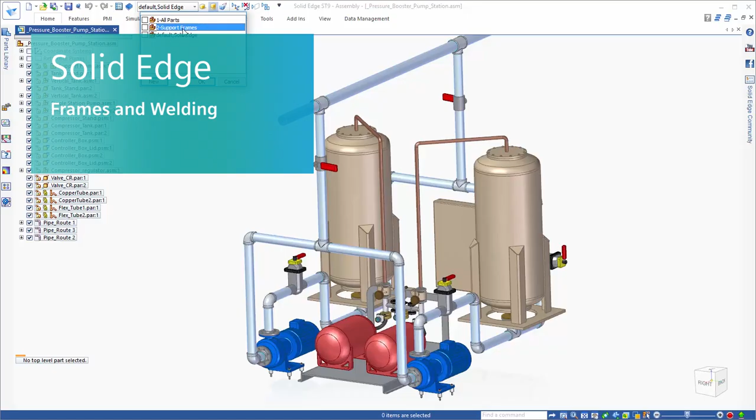In this example, we'll look at how Solid Edge handles frames and welding. Building framework is a common engineering task for many industries, and Solid Edge gives users access to tools that greatly ease the design process when designing and editing frames.

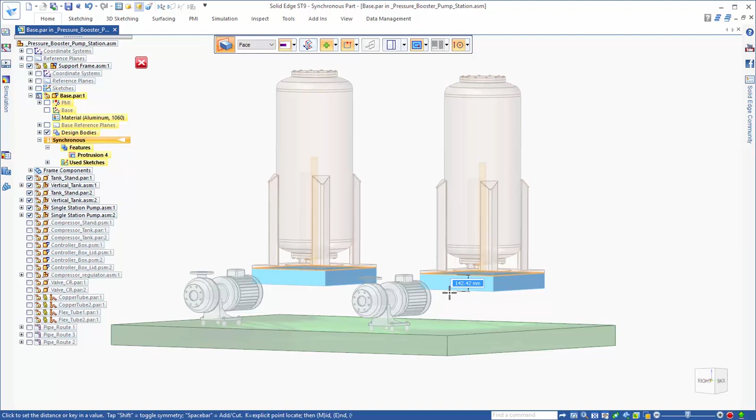The pump assembly framework we're working on has been partially completed, but we still need to finish up some final tasks. Two methods of frame creation that we'll explore today include using sketches as well as edges of solid bodies. Creating frames from a 3D solid means we can use any tools in Solid Edge's synchronous technology arsenal to create the exact geometry needed for our base shape.

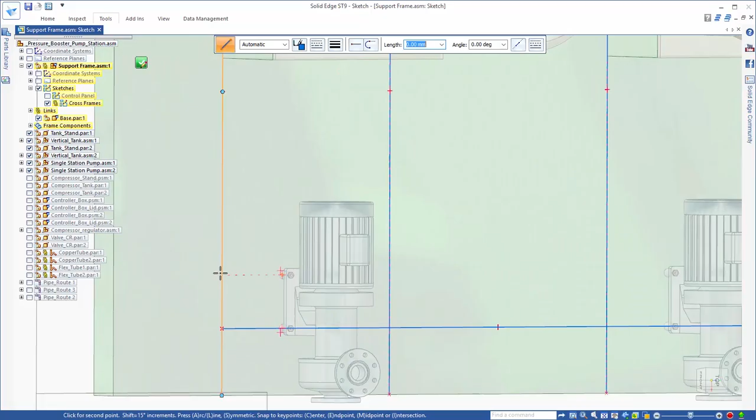Base shape done. Now, let's finish up with sketching the remainder of the frame layout. Notice, whether sketching or using 3D commands, Solid Edge gives full access to background geometry, ensuring that component creation and placement is precise. Now that our frame layout is in place, let's get to creating actual frame members. First, let's create some frame components using the sketches.

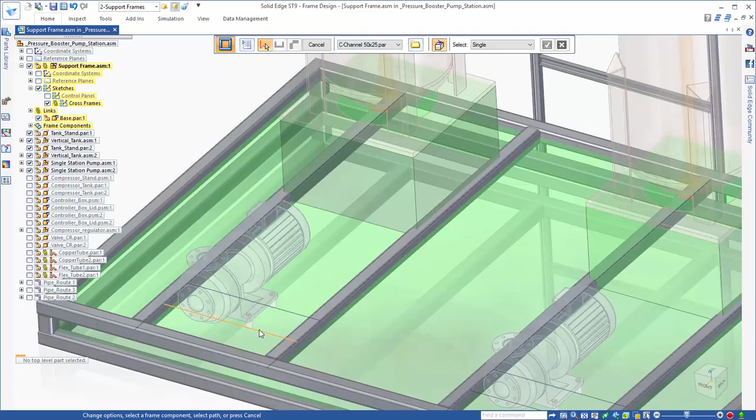Solid Edge allows users to create their own custom frames and cross-sections, or select from a library of standards-based frames. Here, we'll use DIN standard frames, and since we use these frame sizes often, Solid Edge remembers and adds them to the Quick Access drop-down menu.

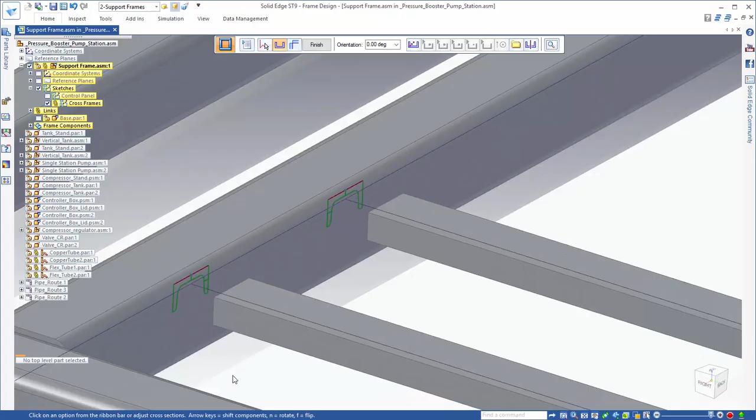Once our pump supports are in place, we need to adjust how the member cross-sections align to the larger beams. Solid Edge provides full control of cross-section location, whether aligning to the controlling sketch from the outside edges, middle, or any key point desired. Proper placement is a breeze. Also, notice that we're editing multiple cross-sections simultaneously, eliminating the hassle of editing each individually.

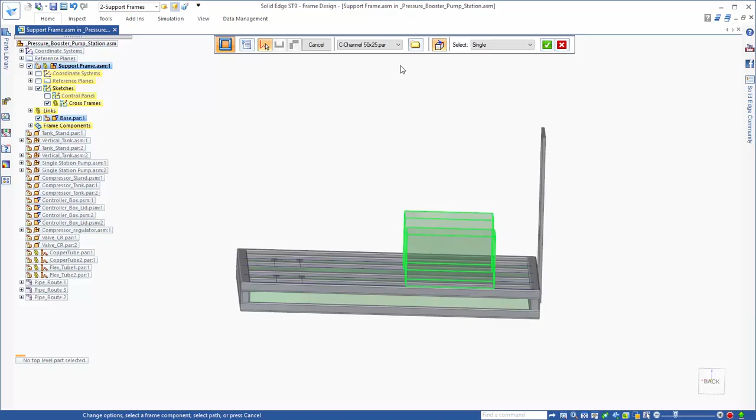Additionally, as we create new frame members, notice how Solid Edge increases efficiency by automatically trimming the members based on the inputs. Now that our internal framework is done, let's look at creating frames on body edges. For the tank supports, we can simply fence select all of the edges of the protrusions. If there are edges that we don't need in the select set, we can simply deselect them by holding the control key, just like in Microsoft Office.

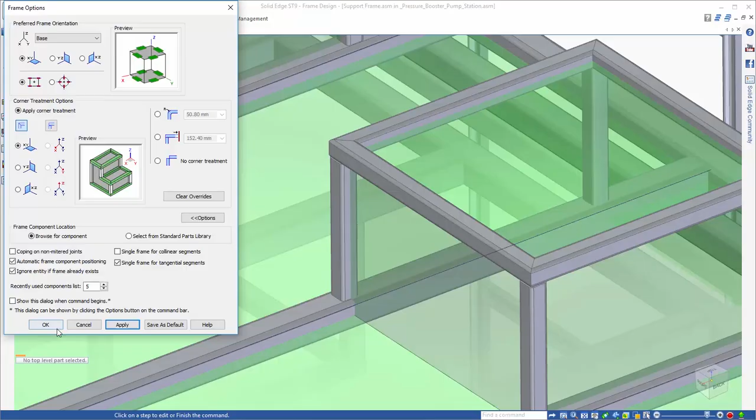Now that the tank frames are created, let's look at how Solid Edge handles corner treatments and how the frames come together. The Options dialog provides options to fully control orientation, custom corner treatments, and cross-section types, not to mention providing a preview of exactly what the end result will be, no matter the settings.

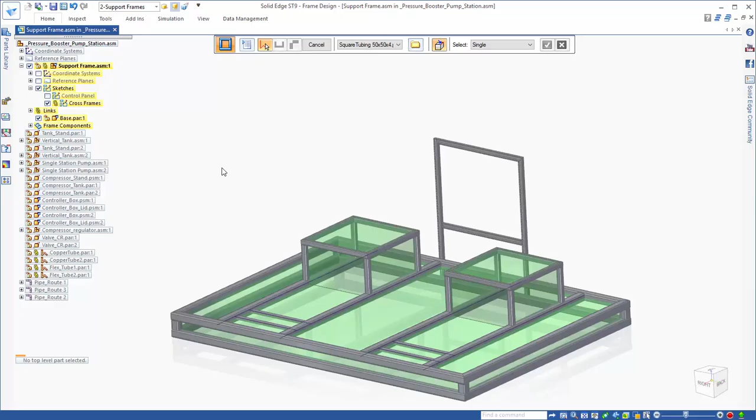But what about this interference between the tanks and the frame? No worries, a quick edit of the cross frames, similar to what we did earlier, and the fix is an easy one. Once again, notice how the associated downward-facing frames automatically trim to the proper length from the change. Just another example of Solid Edge's ease of use and intelligence in frame design.

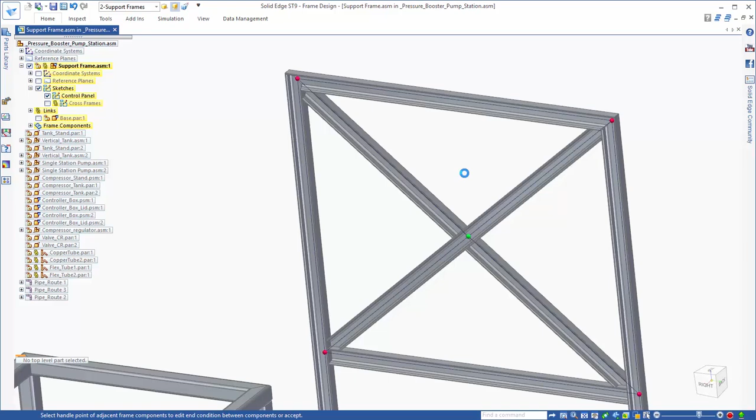The final portion of the pump station framing that needs to be completed is the cross frame where the electrical panels connect. Notice that as the frames are created, Solid Edge automatically recognizes that one frame needs to be a solid beam while the others need to butt up to it. As always, if you need to change how this intersection appears, full control is offered through Solid Edge Options.

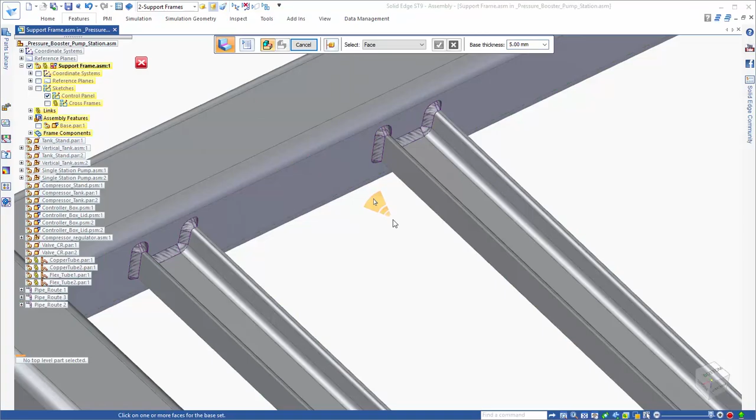Now that all of our framework is done, let's take a look at welding in Solid Edge. Welds can either be created inside of an individual part or in the context of the assembly. In this example, we'll create our desired welds at the assembly level for ease of use. No matter what type of welds you wish to create, Solid Edge provides a full set of industry options to ensure that proper weld definitions are passed on when manufacturing the framework.

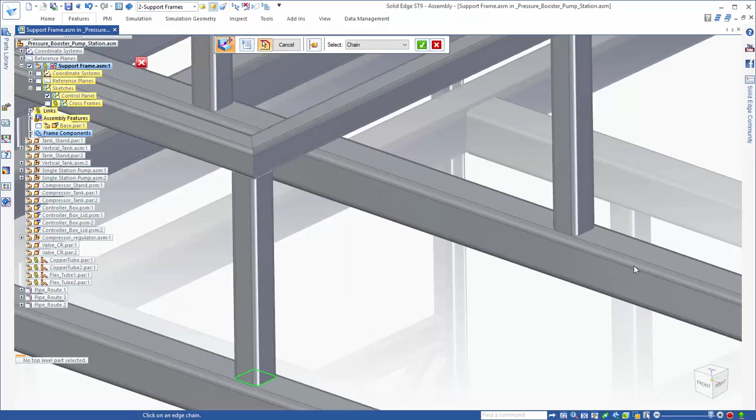Whether users desire to model custom weld cross-sections, place a generic weld bead, or even simply represent a weld with a label, Solid Edge provides all the tools needed. Of course, for common welds, saved settings are a great way to place welds efficiently.

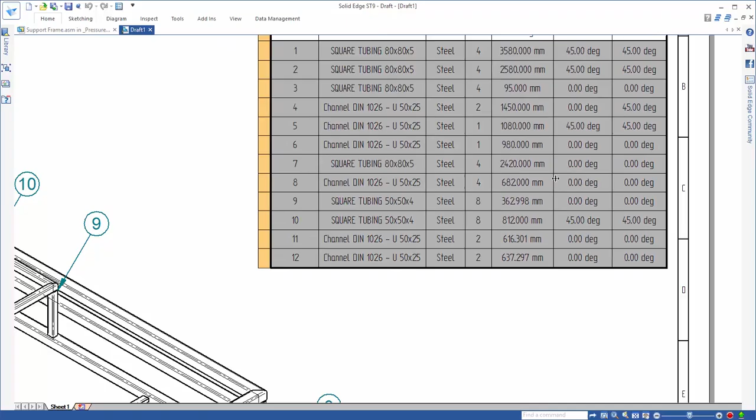The final portion of this example is creating drawings of our frames for manufacturing. When creating parts lists and drawings, Solid Edge provides access to anything you can need to properly define your framework. First, we need to know the exact cut lengths of each individual frame component. Once created, all the parts list cells can be adjusted, formatted, or edited, just like in Microsoft Excel.

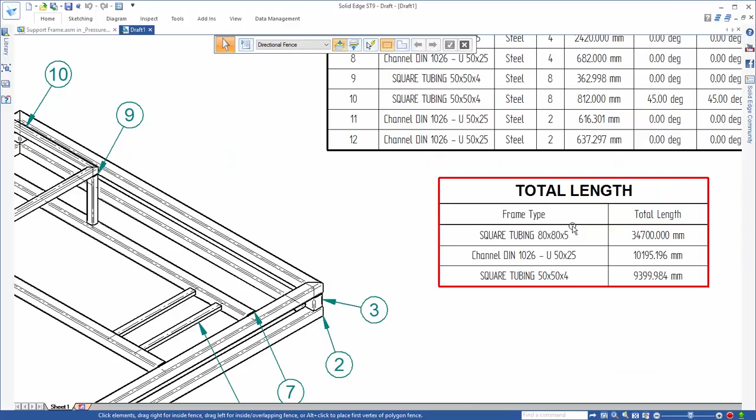Additionally, Solid Edge automatically associates balloons to parts list items, allowing for full control of their location and alignment, ensuring you get exactly what you want the first time around. Next, we need a list of our total frame lengths for all 3 frame types. This is important when purchasing stock for a job, and with Solid Edge's option to automatically include a rough cut end clearance to accommodate for cutting blade thickness, Solid Edge ensures that you get precise measurements every time.

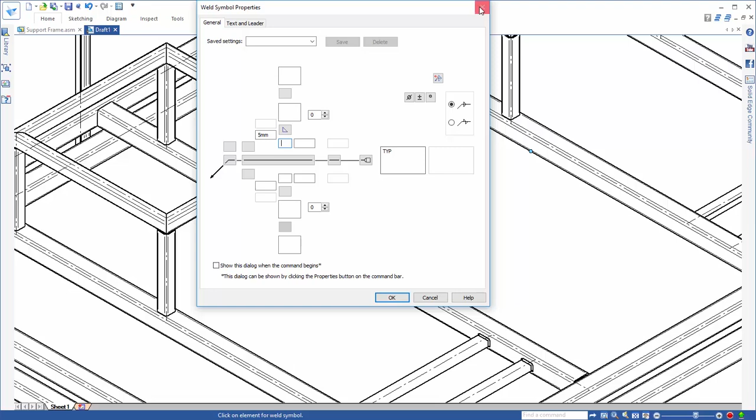Our final step is to identify the welds, and our drawing will be complete. Using weld callouts, we can easily define weld definitions directly in the drawing, or, as in this case, pull the information directly from the model, once again ensuring accuracy.

With frame creation tools such as cross-section placement, end condition control, and trim automation, to full control of weld definitions and placement, and finally, producing accurate drawings for manufacturing, Solid Edge shows how simple and intuitive creating frames and welds can be.